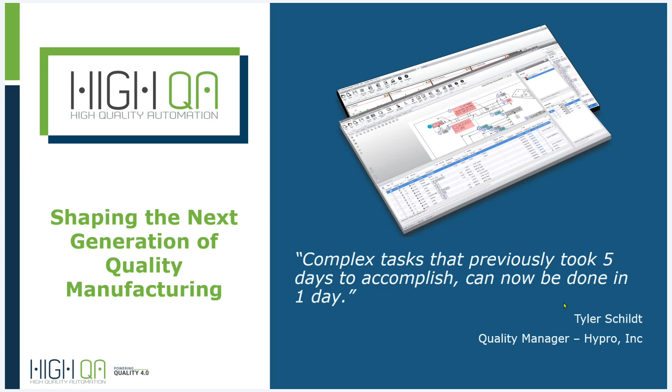HighQA is a manufacturing quality management system. We started this company about 10 plus years ago, following my 25 years experience in manufacturing, CAD/CAM, and realizing that quality is somewhat behind in terms of automation. Because quality requirements are growing and growing, and we're going to talk about it today, it's not enough to do good parts. It's also a lot of documentation like FAI, and a lot of what we call PPAP stuff that was born in the automotive industry and now adopted by the aerospace industry and medical as well.

We have partners worldwide, and Geo Informatics is one of our, I call it, executive partners. We have many customers already in India, and it's important to have a partner anywhere in the world who can support your product and provide services to your product. It's a product that has a lot of functionality and requires training and of course ongoing support. We are proud to have Geo Informatics as one of our executive partners.

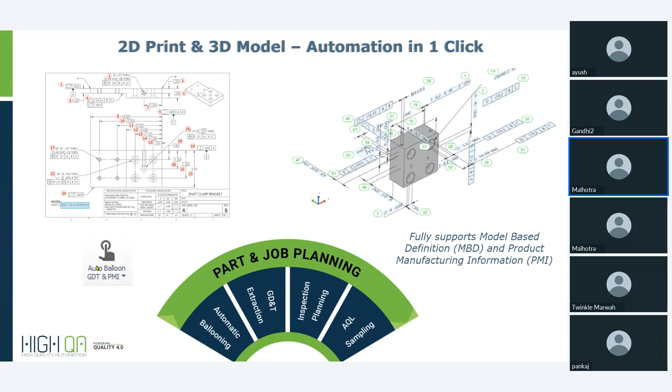When we talk about automated inspection plans out of it, very important is in-process inspection. FAI deals with the finished part, but we always need to do what we call manufacturing operations, not just manufacturing, but it can be heat treatment or plating or whatever processes you need to do. HighQA supports it, and this gives you the idea how we can integrate immediately with the control plan or FMEA from part level.

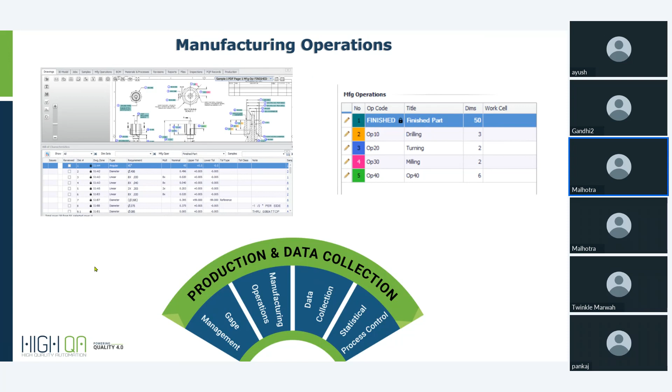I'll talk about it. Tool and gauge management. We integrate with any tool and gauge management that you have, but this one is integrated with HighQA. So the idea is to have complete traceability about which tool was used for each feature, who used it, what date, what time, what part number, what job number. Traceability is super critical when we talk about aerospace, let alone that we handle the alert for calibration. A lot of components here enable complete automation as well.

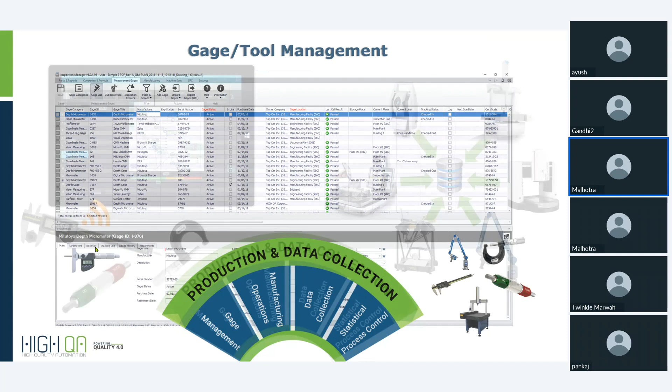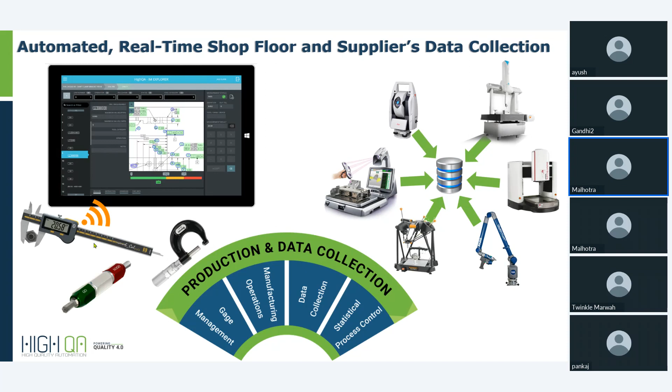As I mentioned, this is production and data collection. We take results from any inspection tool. On the right side, tools that generate digital results come automatically into HighQA. On the left side, any manual Bluetooth wireless gets to HighQA using PC, tablet, iPhone, whatever the case. The whole idea, HighQA is a paperless solution. We don't say start from paper and jump to paperless. There are interim steps that you can take and use less paper. One of them is, of course, complete data collection, not on paper, not on Excel, although you can fill it up on Excel and we will get Excel directly into HighQA.

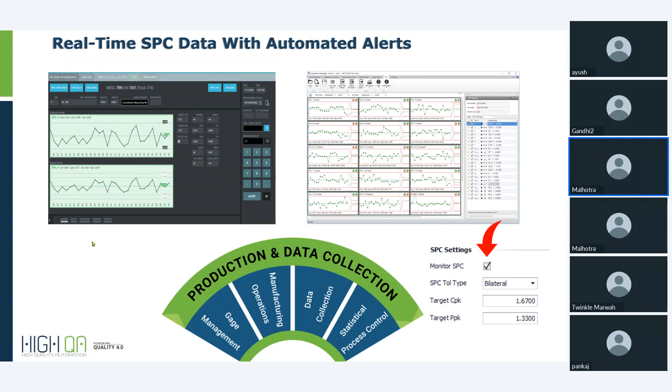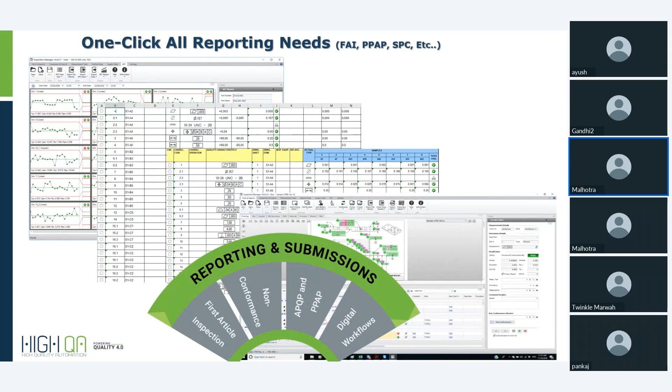As I mentioned, we also handle SPC. When you do massive numbers of parts, if you need to collect SPC data, it is integrated. This is one of the requirements when we talk about PPAP. So it's also integrated with HighQA. Then comes the automated endless reporting. Whatever report you need, the system will generate. You can design any type of report. So again, we can go more and more, but this is very important.

And I will conclude my PowerPoint here by showing you that PPAP is a tab in the HighQA solution. It's not Excel anymore, it's an integrated solution in HighQA. That means anything that you do on the part level will automatically propagate into the document level. So there is no redundant job, there is no copy paste. Those forms that you need to submit to your customer are in the database. You can build your repository of documents by document, by part, by customer, a lot of flexibility. And I'll show you a quick example of what it means.

And then comes, of course, supply chain management, which I will skip now, and we'll jump immediately to the presentation of HighQA.

I will ask my friends at Geo Informatics. Everybody can see my screen with the 2D print? Yes, we can very well. Yes, sir. Okay. So here is an example of FAI, and we need to run. We have about 20 minutes, right? Geo Informatics, just keep me on time. No problems. Keep going.

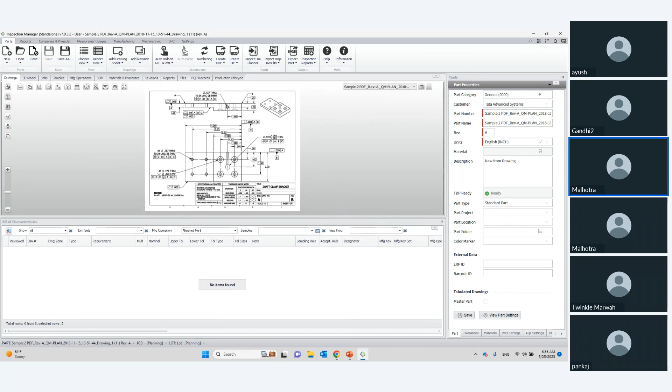So as I said at the beginning, here is a 2D print with requirements. Just quickly here, you can see we can open any CAD file. It can be CATIA, ProE, Siemens, SolidWorks, but we will focus on this one. In HighQA, the first thing I decided to do when I saw how slow the process in quality is, is to take any 2D print, click on a button, auto balloon, a lot of options here, and click OK. I saw people ballooning prints taking hours, sometimes days, with a lot of interpretation and labor. Let me do it again.

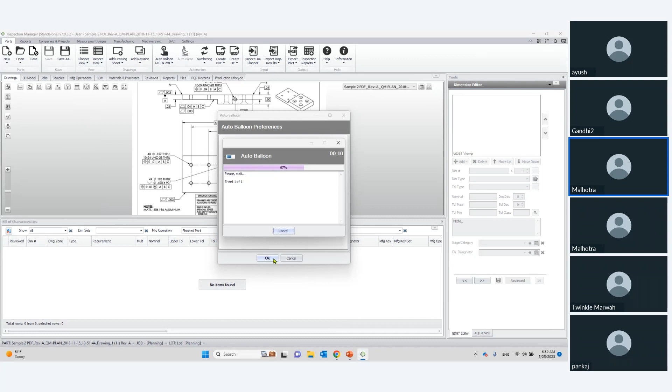So what happens is when we take the 2D print, we extract the data to a bill of characteristics. And actually what you're going to see here is a complete digital transformation. We took a picture, which is a PDF in this case, and we converted it to real data. You can see the ballooned print here, and I'll handle it very quickly. I don't want to spend a lot of time, but you can see what happened in 10, 15 seconds. All the bill of characteristics is now real digital data.

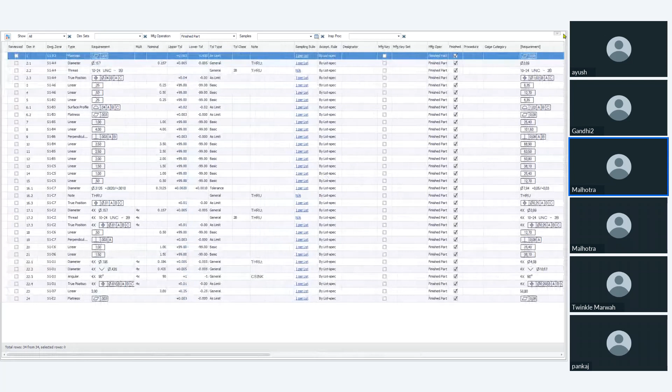So aside from saving a lot of time from people doing ballooning by hand and then taking it and putting it on Excel, still it's not data. On Excel, it's Excel; the print is a print. But now if you look here for a quick second, when you look into dimension 17, you will see the level of the recognition. You see 17.1 is diameter, 17.2 thread, and then true position. All of them are here.

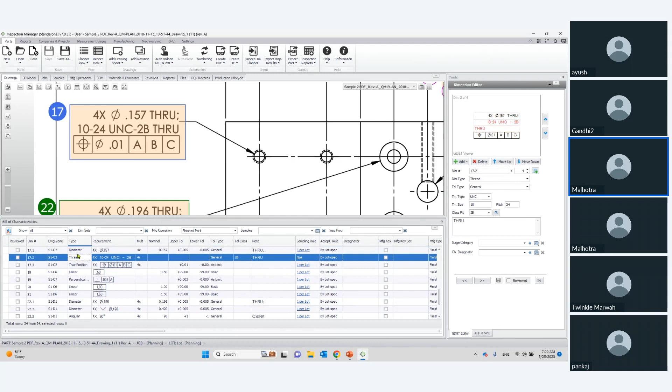And I believe you can see my cursor clicking on it. And it's more than just 4. We're talking about 12 requirements because we have 4 holes multiplied by 3 requirements. And you see the multiplier here. Quickly to the right side, you can see the diameter is highlighted red. And database, this is the key component. 17.1 is stored in the database 4 times. So in the database, you have 12 requirements, not just 3.

If I click here on multiply requirement, you can see all the 12 here. And that just shows you that this dimension, and you see that you can spread, of course, all the dimensions to the relevant holes here, and that's done. But again, if you have 50 holes here, you may need to see 150 lines, and that's why we don't show it, but it's in the database. At any time, I can reset all of them, and we are back where we were before.

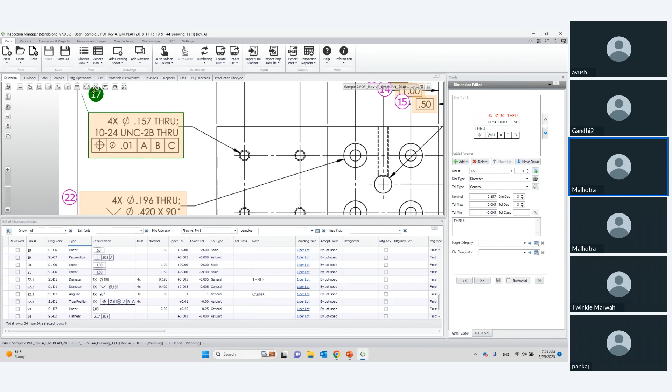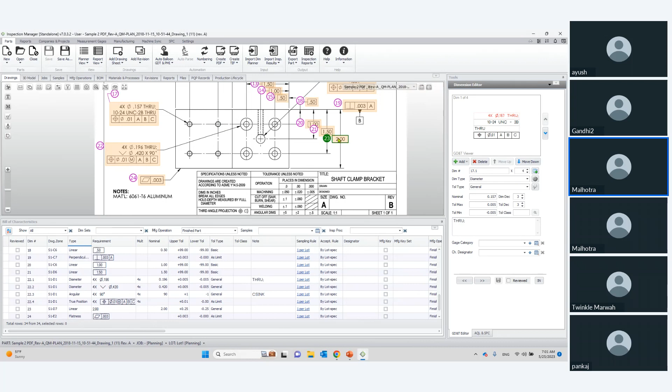So again, I don't want to spend, there's a lot of options on this first stage, what we call downstream preparation. It's about quality management system. It's not just ballooning, because we also manage revision. If you have an engineering change, we compare between the drawings. You can see where the changes need to be done. You can apply them, and we keep all revisions in place. As you see my cursor here, revision.

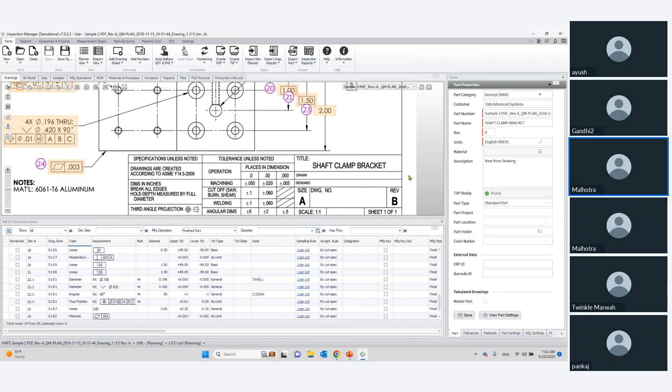I want to move forward to FAI, so I'll take a couple of steps here. If I go and start to say, okay, for FAI, I need to extract data from the title block. So I'm going to extract title block text, right? And I'm capturing the part name, and I'm clicking on it. And by the way, I'm not using the keyboard almost at all. Keyboard means mistakes. So you see the part name is in the database. Now I'm taking the revision and putting it in the database. So we have part revision.

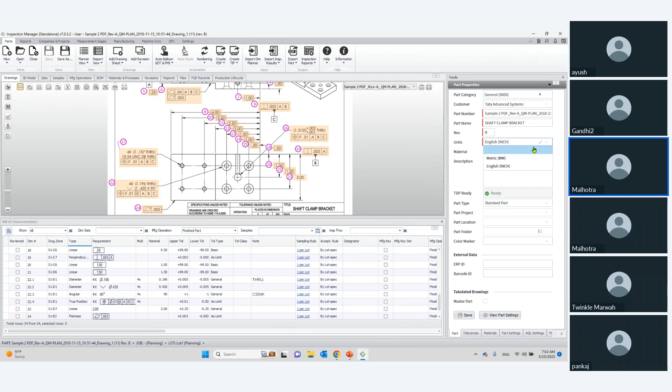In your case, it's very important because you may have jobs coming from outside, from India. Part of them inches, part of them metric. In this case, it's metric. We support dual units. We found many cases and many places where people need to convert units, they're using a calculator, Excel, and we found a lot of mistakes, mainly after the decimal point. We don't say do it like Excel or calculator.

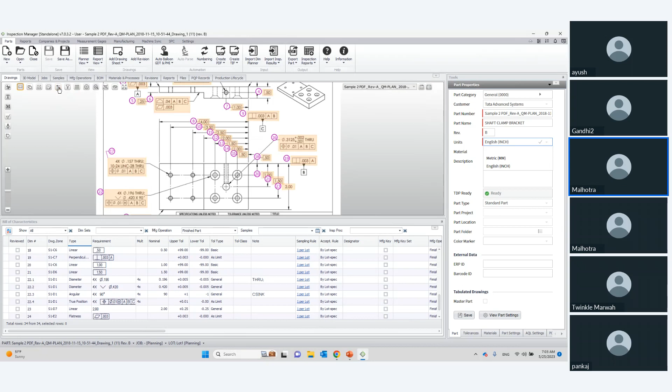In HighQA, all we need to do to convert between units is click on those 2 arrows. One click is metric, one click is inches. So that's also gone away. It's not magic. It's all already done in the database at the beginning of the process, in the first 10, 15 seconds. Another thing you need to do here is report on material. And when I'm clicking on material, I'm going to capture the material. And this material is now also in the database, as you see on the right side.

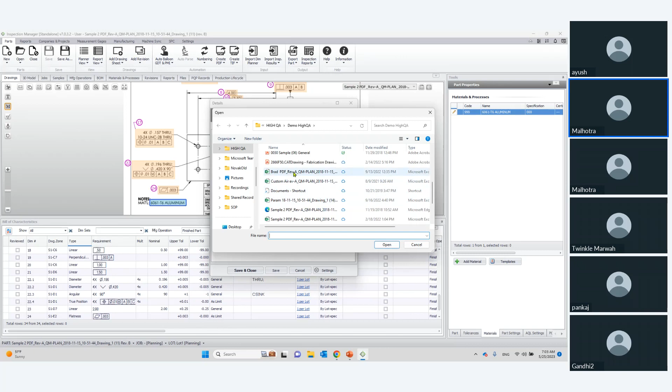For material, of course, you need more data. It's not enough just to say material. So every time you see a pencil in HighQA, you can add all the relevant information for material: code, specification number, the cert number, who is the supplier that you bought the material from, and you can upload the cert, and the cert will always be in the database. I'm picking arbitrarily something here, 266 something, and now my material is in the database.

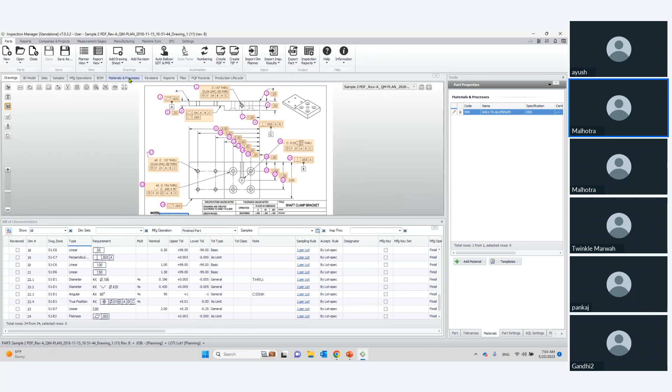Talking about the aerospace industry, there are auditors coming to audit you, and they ask for the cert. No need today to run and find it in folders, subfolders, or any hard copy. If you go here, you see material and processes, and here's my material. Here is my cert in the database. Nothing got lost. Nobody ever needs to do save as in HighQA.

It's all saved automatically, and nobody will lose anything here. I'm moving forward a little bit to say, let's create inspection plan.

But before then, I want to go here, for instance, to perpendicularity. As you see, it's here, and I can assign designators. So I said this is flight safety, and you can build your own designator here. You can assign gauge category. It's important because it's flight safety, your customer requires bore gauge. I know it's not right, but just to give you an idea that you have all the tools, what we call downstream preparation. We would like to avoid any interpretation from the shop floor or quality department, definitely from outside supplier.

Another layer, if we're talking about SPC, you can assign, let's say, CPK, PPK. You just click on it, and now perpendicularity is going to get data. I'll take another feature for CPK, PPK, if you're familiar with it, to collect data. Now that's it. That's all you need to do for SPC.

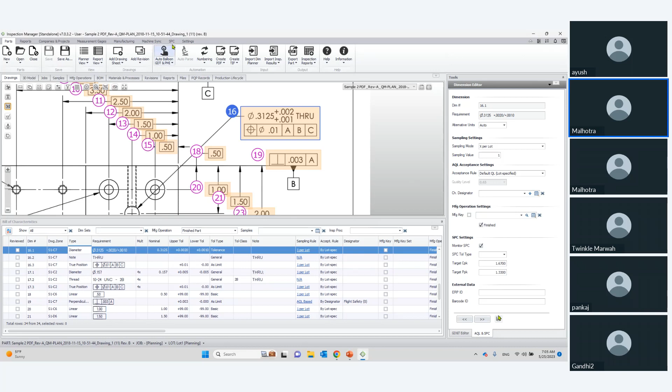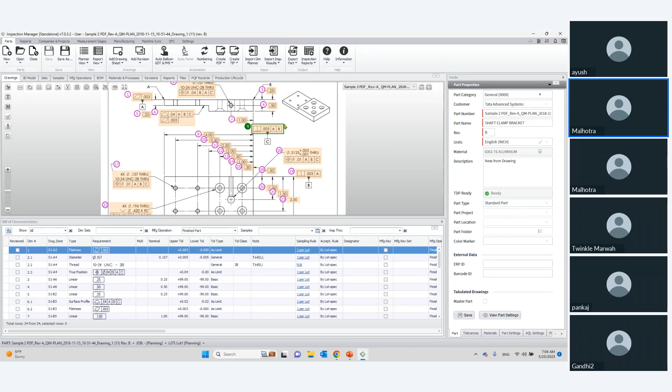If you go here on the tab, then you can see SPC here, and you can find those two features I selected. When we get production inspection results, SPC will be filled up automatically. So talking about downstream preparation, there's more that you can do here, but I don't want to spend all the time showing you all the feature functions. I believe it's clear that downstream preparation is done very quickly, and now we create what I call the common language for everybody.

Okay, I don't do copy paste, the system knows exactly where I am. And now you see what we call the common language, which is the inspection plan. I believe you can see it here. I put Tata because I think it's your customer, Geo Informatics. Here is the title block data, the material, the part. All the requirements are here, including the safety, flight safety, and the bore gauge requirement, and it's all ready.

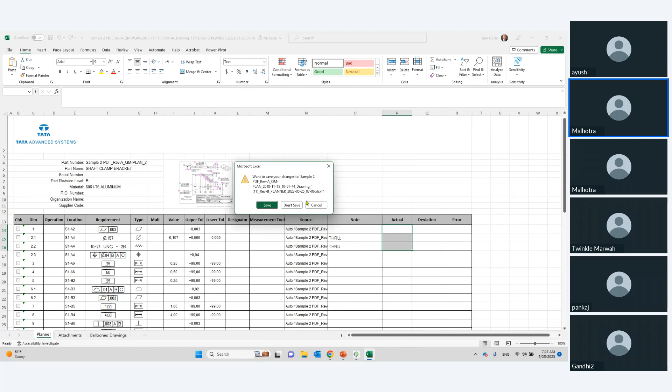Now actual can come here even manually, as I mentioned, but I would like to show you a better way to get inspection data. I will close it, and you see the system asks me if I want to save it or not. Usually you save it in a folder or subfolder. I don't save it, and quickly here, the reason I don't save it is because it's automatically saved in my report.

Now you can see inspection plan, you see the date and the time, it's US time. And every time you need to see any document, it's always in the database. And if you want to see it again, click on the eyeball, and here you go.

Now, when I say you don't save it and it's stored in the database, it's important to mention that HighQA works against jobs. So if you will not create a job or we are not getting it from ERP, the system, when I'm creating a PDF, will create a job. But quickly here, when we get a job from an ERP system, you have a job number, you have the quantity, and then you can assign already what the quality requirements are based on your customer requirement, like AQL, acceptance quality level, inspection level, and you can manage it in that way.

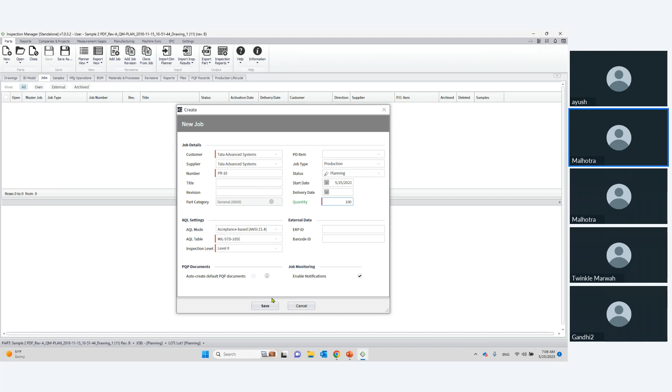So when I'm creating a job, the system isn't just creating a job, it builds for me everything, including the lots, the sampling that I need to do, designator, notification, file, and this is very important, which I'm going to talk about. You can see here, auto create PQP document.

This is the PPAP. You can say at this point, all I need here is standard new part PPAP index, what workflow I would like to use, right? And have your workflow in my repository.

And once you do it, okay, once you do it.

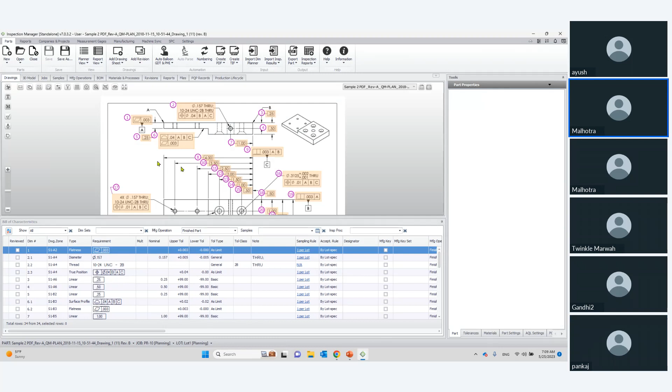Okay, so we have everything, and now we work, of course, against job, and I have all the quality requirement ahead of time. So everything's saved against job number. You can have a master job number. Let's say my customer wants 10,000 pieces of something. So you can create a master job, and every time you need to provide him 1,000 pieces, there is a sub job. It's all managed here with your ERP and directly with HighQA.

Now I would like to simulate here, we don't have a lot of time. I would like to simulate here FAI, reading results from CMM. So every CMM, I'm going to export the part as CSV. Every CMM output data, I'll put it on the desktop. Every CMM output data can be, I'm going to put it in Geo.

Desktop, it's open. Now you can see Geo here. Every CMM, VMM, the output is either CSV, XML, or text file, and the team at Geo Informatics will confirm it. They are the experts, of course. But you can see here the part in a CSV format.

We have here the nominal, and in column X we don't have actual. So what I'm going to do is take the nominal and convert it into results, like I have CMM results. Control C, and I'll paste it here in column X, Control V.

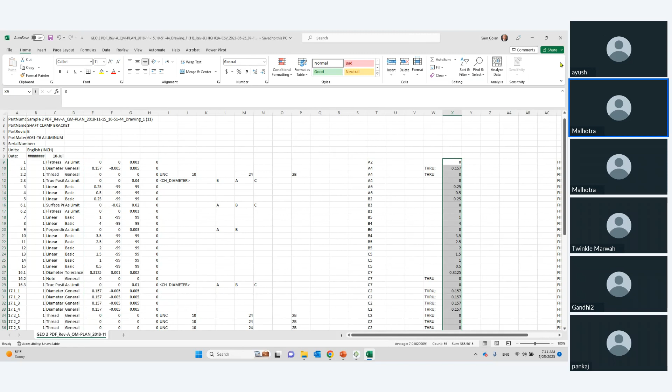I'm going to save it. Now, very important: in HighQA you don't need to do import like I'm going to show you shortly, in 2 clicks. We have import of inspection results coming from a folder that sits in your network, and all the results come automatically and directly into the HighQA database.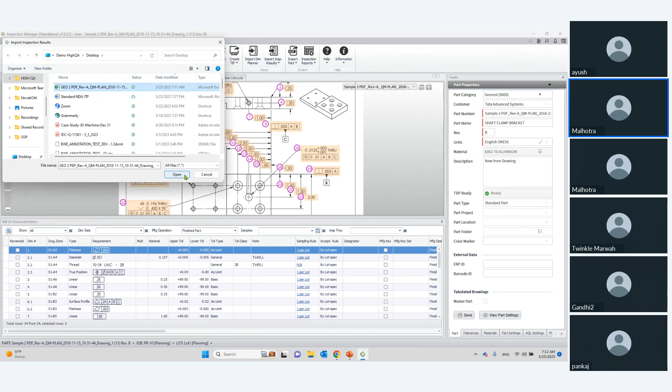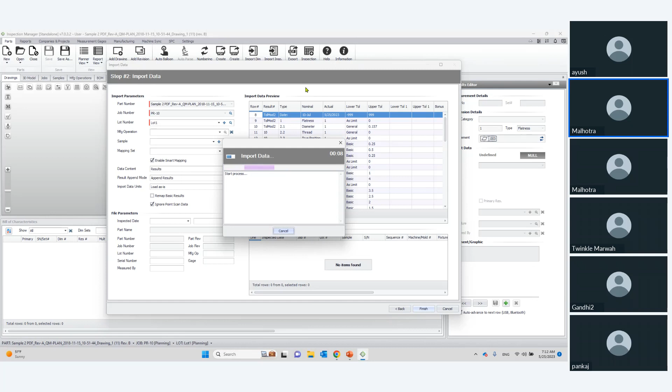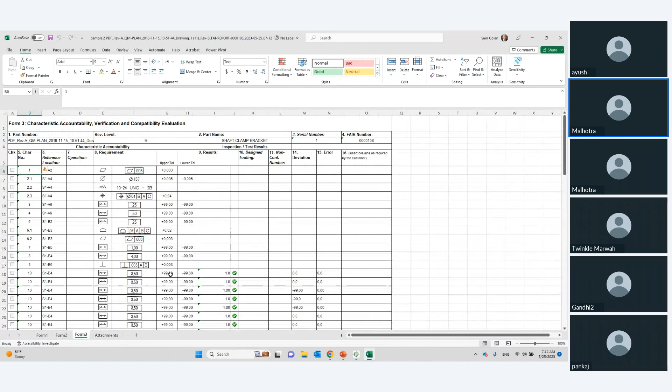So now I can create what I call an FAI in one click, after I have all the inspection results in HighQA. I can go here and create the FAI, one-piece report. My FAI is completely ready, and all the data and results are in the database. You see Form 1, Form 2, Form 3, right? All the attachments and everything is actually in the database. As usual, I'm not saving it, but you can have tons of results here.

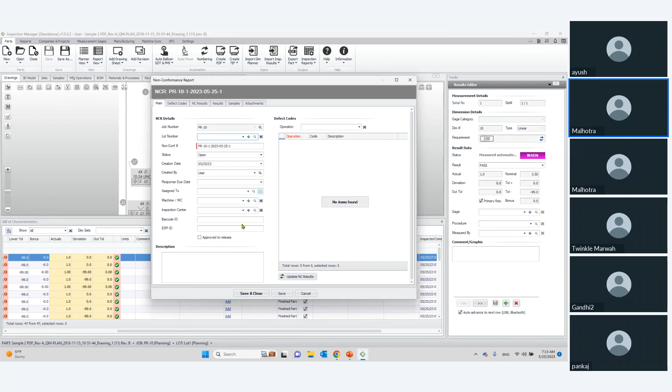And if you have failed data, you can have what we call a non-conformance, as you see here. So you can fill up non-conformance immediately. It's all rounded out completely, starting from the 2D print all the way to the inspection plan, incoming inspection, and of course the report.

I can close it, and I can open it again - I'd like you to see the HighQA database, and I can open it again. Nothing got lost. All the information stays here against the job, as I mentioned.

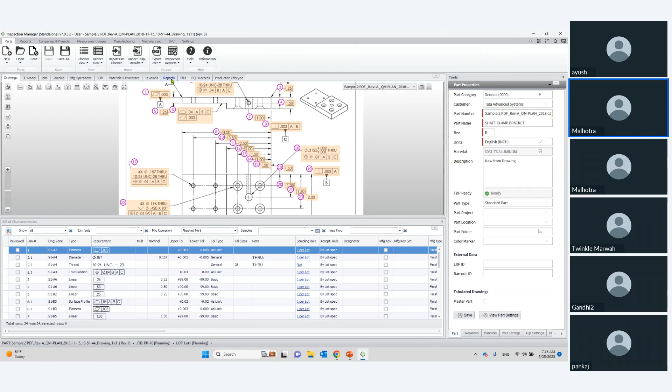If you see here on the report, now I have two reports: the AS9102, and the inspection plan. Quick question for my friends at Geo Informatics.

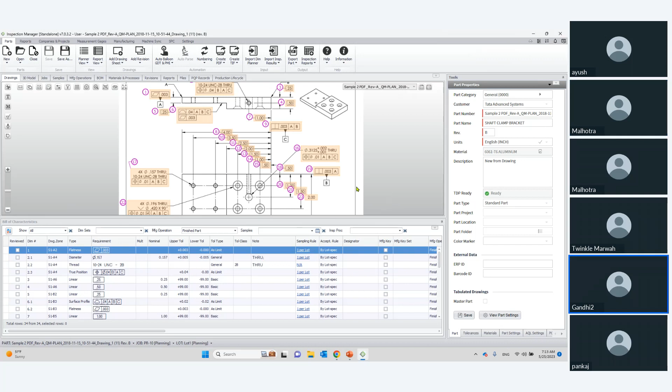Can I continue in another two to three minutes about the PPAP stuff? Yes, yes, you can go ahead for another five to six minutes, no problem.

So now, here in the system, we have the job number, we finish it, and I can go to my PPAP document. I'll just simulate a little bit and show you more than that.

I'm saying, okay, this customer needs a standard new part PPAP, and I'm clicking bring me. So at this point all my submission forms are here - design record, part submission, FAI - and whatever I did on the side of the part propagated automatically into here.

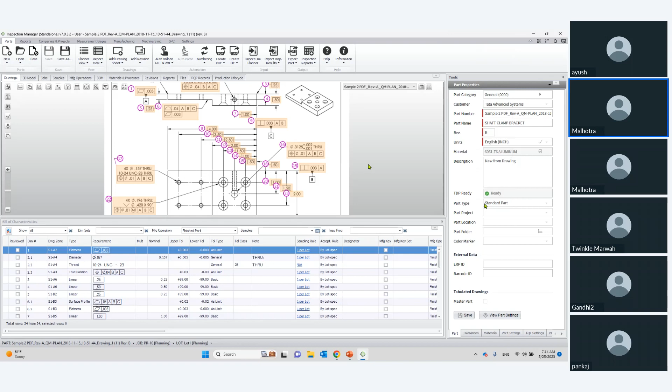So if I go here, I'd like to emphasize something very important - how this stage of what I call downstream preparation already propagated into my PPAP document. So if I go to manufacturing operation, the system says, okay, this is your finished part. I know you know how to do FAI, but what happened from the raw material, which is the block of aluminum, all the way to the finished part?

So I'm going to simulate the first operation, roughing - that means I'm going to rough the part, bringing it to this shape, and leave some material for semi-finish and finish. As you remember, I'm coming from manufacturing industry, so I'm taking the width, the length, and the height, which is my box in a way. So I'm adding the operation.

So one operation is already added, and I can add as many operations as I need, not necessarily manufacturing. As I mentioned, it can be plating, heat treatment, all types of operations. That's important when we talk about the control plan and FMEA.

So you remember when we talked about the pencil - now we can add data. Now you can see here, a very important thing: this is where we start working on our PPAP stuff, the control plan. You see process - this is your company's process library. You can have here 500 processes, not necessarily only milling, manufacturing, cutting - whatever it is. You can have other materials, all the processes that have impact on your control plan, FMEA, etc.

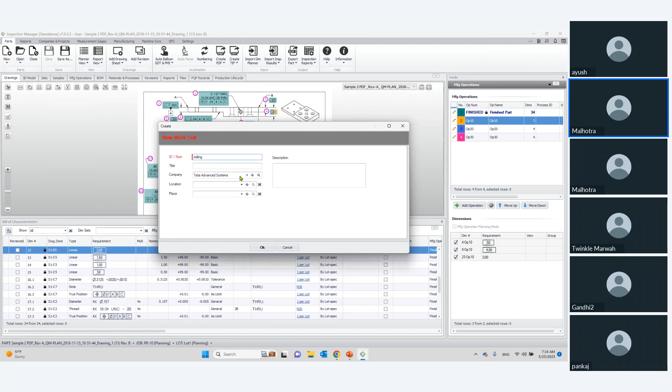I call it milling, and I have a title for it. I have a lot of stuff I can do, but I don't want to spend time. I click OK, and I have operation 1, then 2, 3, 4, and 5. So the system is smart enough to handle all types of operations, and it's smart enough to create an operation sheet. Now you can see only three measurements for what we call roughing are highlighted.

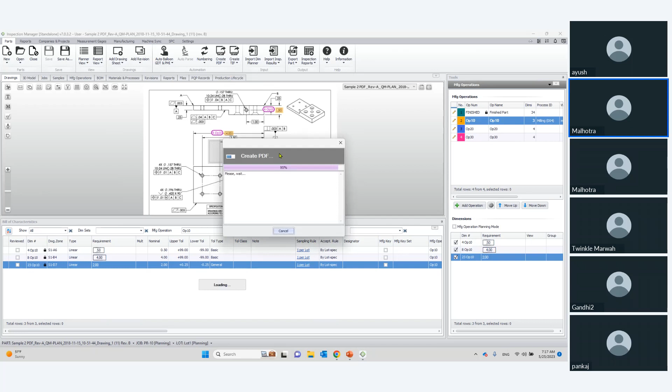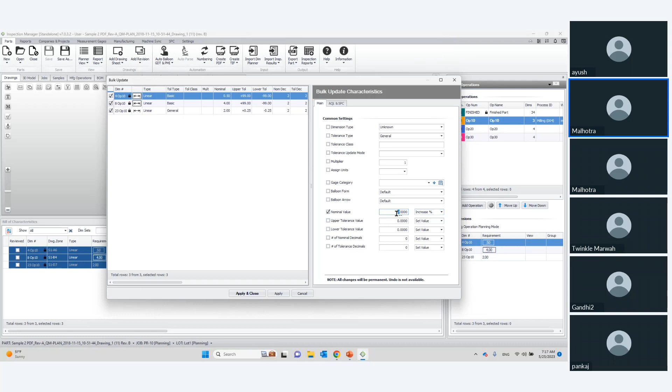So I can create an inspection sheet. Of course, I can go and create my PDF, as you're going to see here. And I can create an inspection plan for OP1. You see the nominal and tolerance are for the finished part, but you can add to the nominal value. I can add nominal by percentage or number, because I need to leave material from the nominal itself, which is the finished part. So I added a little bit of material. A lot of capabilities here, and I create an inspection plan for operation 1, 2, 3, and 4.

So all of them is done, and you can handle high QA processes without needing to get out to any other system. And you see OP1 again, actual. At this point, probably the actual will not come from CMM, but it will come from data collection on the shop floor when we talk about OP1, 2, 3, etc.

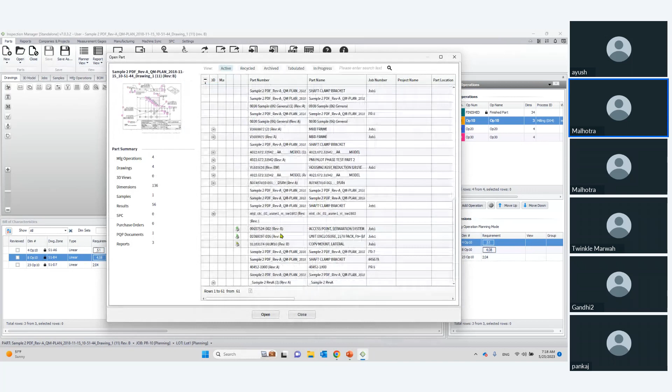When we go back into the inspection plan, I would like to touch base a little bit here. When we talk about the PPAP stuff, now there is an option here, what we call to fill up my process library. And now you can fill up your process library. If you go for any type, like milling, whatever the case is, you can see below what milling is, what is the P-flow and template FMEA. You can build here, add a new row or stuff like this, and add all the failure modes.

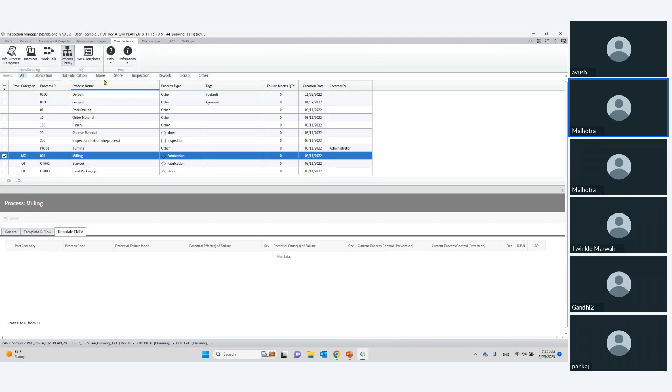And when we go here into settings, you're going to build up your component library. You can say here's my system component. I have indexes, and the indexes can be FAI, standard PPAP, and each one of them contains all the information, all the forms that you need. There are workflows. So what you see here actually comes out of the box, and you can add your own forms. If you need different form customization, it can be done.

Going to system component, you can go and create other indexes. You can build it based on your parts. You can create a folder, and I can create Boeing, for instance. So you can create all your hierarchy, and under Boeing I can create another subfolder. I can create another folder, calling landing gear. I think I wrote it right, save. And under landing gear, I'm going to get all my parts.

And under all parts, I can drag and drop all kinds of indexes or separate forms. And once it's ready, the system will automatically, if you remember in the job level, let me go back here to the part and I will conclude. In the job level, if we are here, I can set up my PQP and say, okay, for this part I don't have it because I don't have everything. When I fill it up, then the system will automatically propagate the PPAP requirement automatically. We don't need to do anything, and it will be filled up automatically into the system.

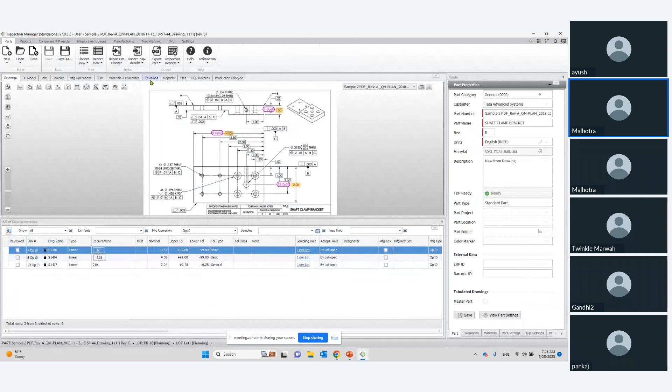That's definitely HighQA, but HighQA does much more. We are handling the content, what's inside the file, as you know, the bill of characteristics. I'm sharing again my screen. When we talk about revision management, it's an existing revision, but I can, you see, add revision, and I'm bringing another print that has an engineering change.

HighQA compares between the content. So the two prints are on top of each other, changing color, and we show where the differences are. And when we accept it, we add balloon, we delete balloon, whatever you need, and this second revision is here. What you see here is like check-in, check-out, but we handle also the content. So that's a big plus. Sorry about the long answer, but I thought it's important to explore more.

Sure. The next question we have from Mr. Rangaswamy. In the production environment, our inspection plan has to be dynamic, WRT sampling inspection report. Can I use my previous inspection report data to decide a dynamic sampling plan? I'm not sure I completely understand the question, but when I heard dynamic and I heard production and I heard sampling, I'm trying to connect the dots.

So HighQA, when you create sampling, that's one thing, but sampling may change for different reasons, because you may say, I need to inspect 300 pieces, and based on this, an AQL, acceptance quality level, and other parameters, I need X samples. Let's say I need to make 30 samples from 300, so every 10 I need to check. But you may say, not this way I want you to do it.

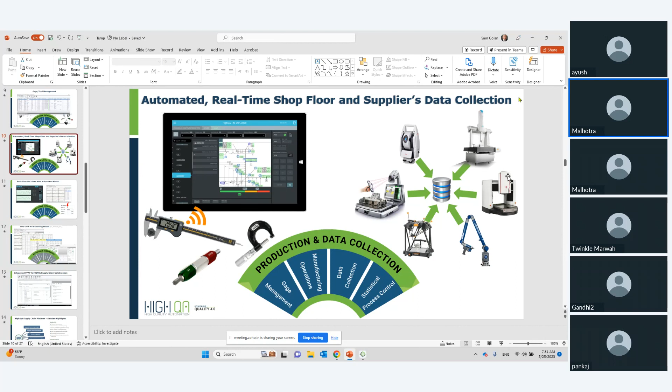Okay. The next question we have is how the tools can be captured in this. How the tools, the inspection tool, you mean? Yes, I guess, yes, that is correct. Okay. So if I go here back to HighQA on a part, okay. I mentioned here, if you remember, that I selected a feature, I can assign here a tool category, okay? But I didn't go there because of time. But as you see here, all your inspection tools are here.

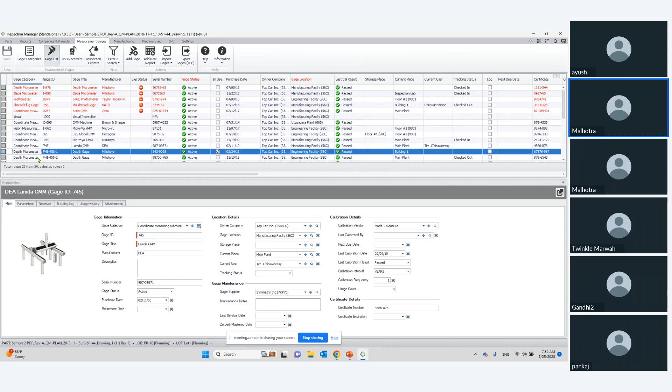So when I am selecting an inspection tool, the system requires the tool ID. You see gauge ID 745 here, gauge ID 174 here. So we can get the exact tool ID if you scan a barcode, QR code, enter it, take a picture, whatever the case, we require. If you don't give me the gauge ID, I will not accept inspection results unless you have a general gauge ID, and then you can force the system. This is not what I recommend. But the idea is that I want to see if I have something here to share with you. Oh, I have some example here.

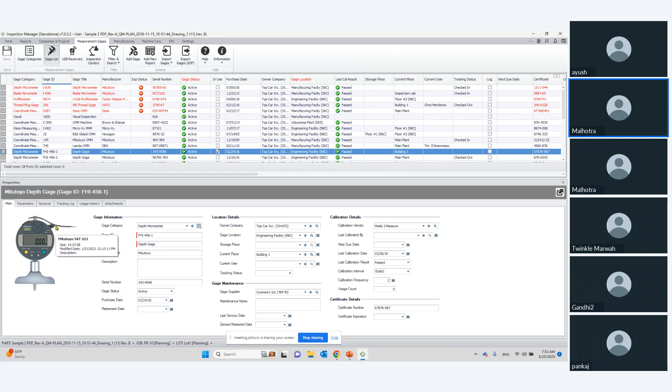Yeah. You can see here, when I'm talking about, for instance, a depth gauge, when I'm taking results with it, the system stores all the usage history for every inspection tool. And you can see here an example, usage history. We know the part number, the job number, the lot number, the serial number, the results, failed, more. If non-conformance, open, what operation, what gauge ID, who is the user, date and time. So we collect everything automatically.

How is it done? Because the system can manage users. That means not everybody can do whatever they want. It's user and credential. So you log in the morning to the system, we know who you are. If you have Active Directory, it's one login, you don't need to do more. But we know the user. We know the job number. We know the part number. We know the feature number. We know the tool number. We know the date. We know the time. It's all done completely automatically.

Now, here is an example. I'm expanding a little bit. You can see here those red ones, with expiration status, they didn't go through calibration or whatever reason, retired. We don't delete them because there is history as well here. But nobody will be able to enter inspection results from a tool that is out of calibration. The reason is here.

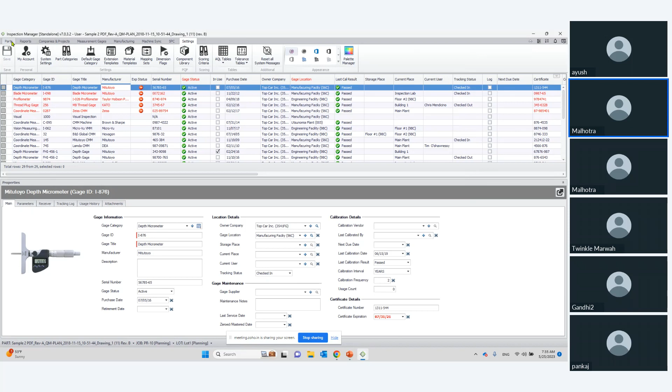You definitely can get anything to Excel from here. Absolutely. Exactly. The system enables you to export to any format, anything, anytime. You see, export part, I did it for CSV. You remember when I simulated inspection results, but I can export it as XDFX, CSV, SPC. Even if you are using a different SPC, we can export the part in any shape and type.

Sam, I can just add one point here. Any shop floor equipment, from a digital vernier to the level of CMM, can be added directly into the system. And within our country, we have done this work with a couple of organizations. I can surely name some of them. For example, LG is one of the companies, of course, not in aerospace. The second one is Motif, which is an oil and gas component producer. All the CMM shop floor equipment are being engaged together.

Right. Okay. The next question we have is, so we do not need macros to convert the data into an organized Excel sheet? You don't need macros, you said? Yes, macros. Absolutely nothing. Okay.

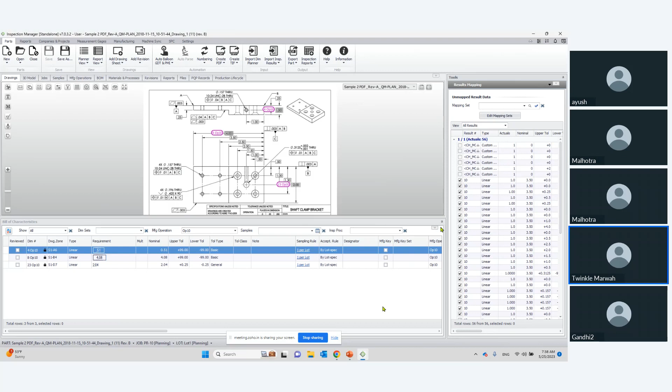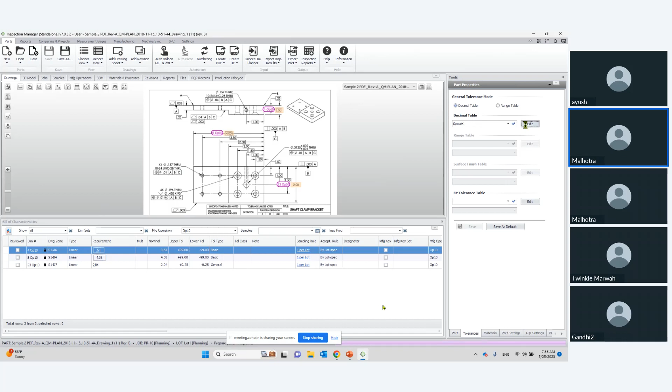The next question we have is, how to create a new tolerance table apart from the already given international standard tables in the software? Okay. In the part properties, you can see below here, tolerances, right? And I can say, here is my decimal table or tolerance table, right? And you can see here, edit. So I can do a decimal table, any shape, form. I have SpaceX, I have KV, I have J.

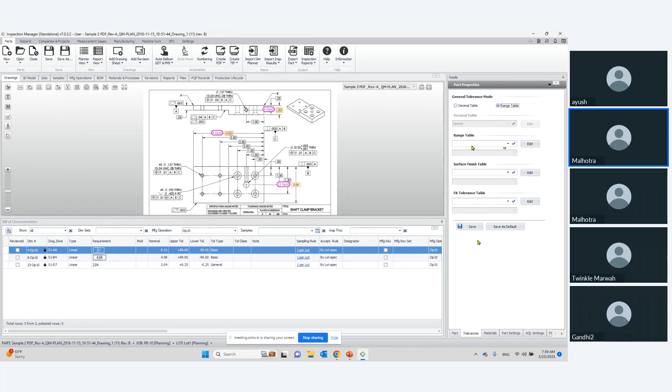So you can click here, you can add and call it another name. Call it, I'm playing, of course, call it Boeing, whatever it is. Then you create your English matrix, whatever you need. You can go here on the range table and create a range table, a surface finish table and a fit tolerance table. It's a lot of capabilities. And once you save it, let me be clear, just to make sure we understand what I'm talking about.

In, let's say, SpaceX, which has its own tolerance table, all the GD&T that are on the part, on the drawing, will be recognized by HighQA. All the non-GD&T, when I don't have GD&T, we're going to take it automatically from the table and apply it on the bill of characteristics. Okay?

Hello? Yes. The next question we have is, does the tool read a document which is a scanned PDF copy of a printout? Of course, we can read any document.

Now, to make sure, you saw here, we did it in, there is echo, guys. Somebody needs to be on mute.

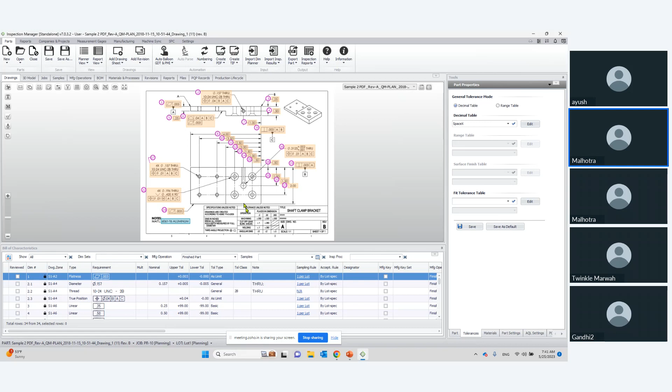When you have a document or PDF or scan of a scan of a scan, here is the most important statement. There will be no document or drawing, whatever the quality is, that you will not be able to finish in HighQA. This is one statement. Second statement, it may not take 15 seconds, it may take 3 minutes or 5 minutes or 15 minutes, depending on the amount of ballooning. But here is my third statement, which is super important. Once you do it and you invest a little bit more time, all the bill of characteristics here are trusted, okay?

In many cases, we have customers with drawings from the 60s on Sikorsky, and it's mainly repeated parts. And they worked for weeks on 19 pages of hand drawing, not drawings done by a CAD system. In HighQA, instead of doing it in 3 weeks, they do it in 3 hours. But right after that, all of those bill of characteristics below are trusted. When they get the part again a year or 2 years later, they don't need to do anything again. They're going to give it a new job number. They don't need to balloon it again. They don't need to do almost anything.

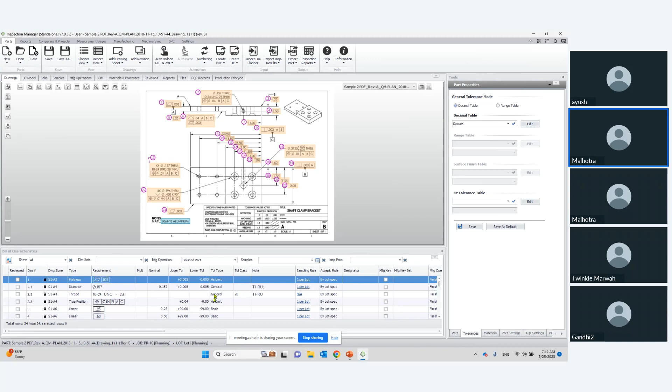So the whole idea is that you do it, whatever. I'll give you an example. We have a lot of time. Let's say we balloon this print and it's not a good print, okay? Let's say the first thing I want to do is, you see I'm deleting one of the balloons. Let's say I missed 1 or 2 or 5 balloons and the print is very bad and it's hard to see in the balloon jungle what I missed, because this is the first thing I want to do.

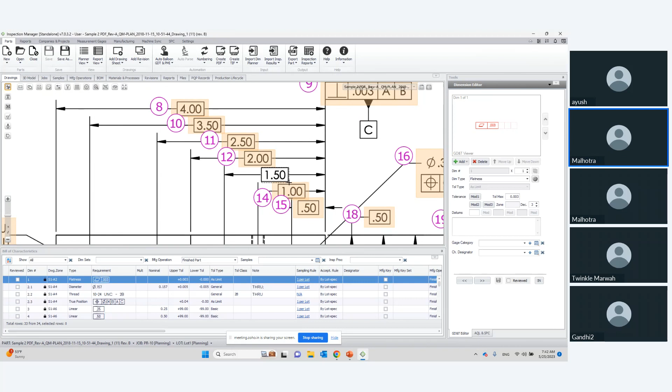So in HighQA, you can go here and click white out balloon, and now it's very easy to see what's missed. And I'm going to fix it in 1 second. I said, okay, this balloon is missing, so I can move it, I can change the size. I don't want to do it now. But see what happened, because I deleted, now I'm adding a new balloon number. I deleted number 13, but I got 25. 25 is n plus 1.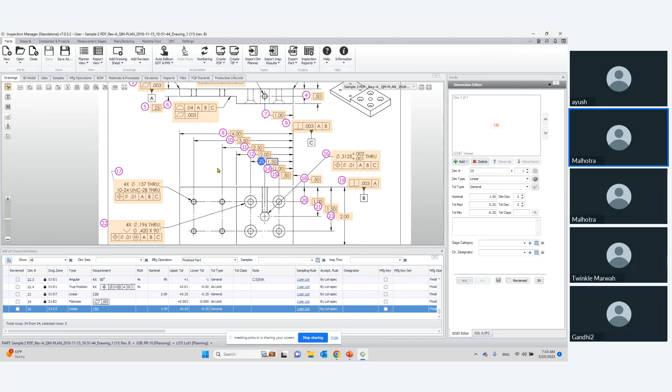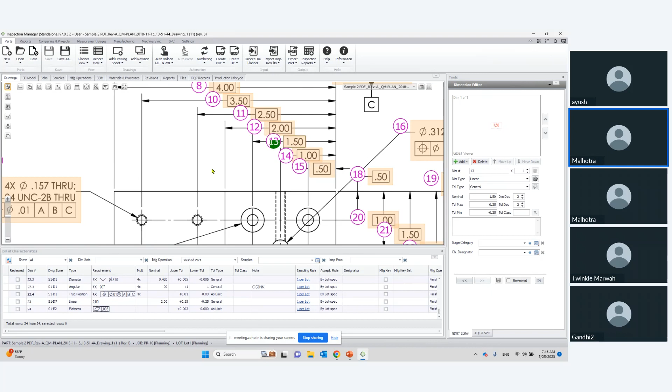It's always the last balloon plus 1, because of the quality management system. Because I deleted it manually, the system thinks that it's an engineering change. In an engineering change, when I'm deleting a feature and adding a new feature, I cannot use the same balloon number. But this is not the case here. So in this case, I can go and do renumbering, and I have 13 back, right? So I can do this very well and not miss a balloon.

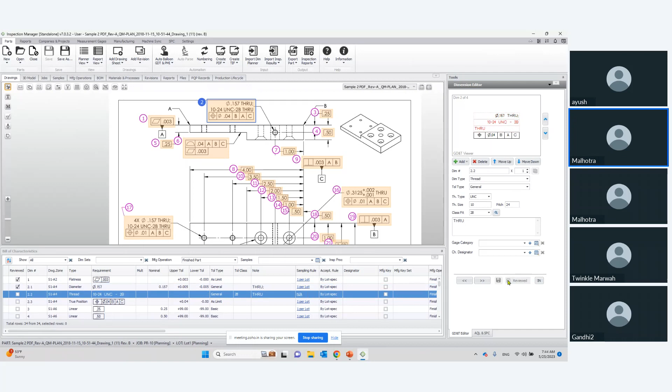But I would like to review quickly the whole balloon list here, which will take me minutes, sometimes more than minutes. You see here, I'm standing on balloon number 1. It shows me its flatness, and I'm saying, okay, reviewed. See, the system takes me automatically to 2.1, and I'm saying this is good. Then true position, it's good. No, it's thread. True position is good. Now it takes me to the linear, a mistake, it's not linear, it is diameter. It's not 0.25, it's 0.27. You save it, you click good, you move on.

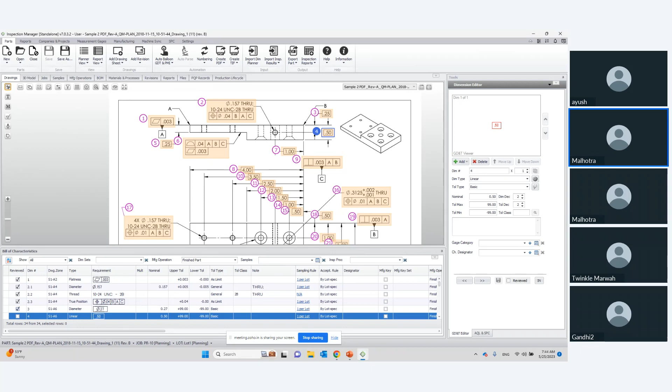Now see what happened on the left side. You see reviewed. So now you know it's trusted, okay? That's the only thing you need to do. It will not be 15 seconds. It may be 10 minutes. But now all the bill of characteristics is trusted. I explored more on this because it's important, because you're probably going to face more than one old drawing or scan of a scan. No issue. You can do it here. Once it's done, it's finished. Now it's in the database. Next time, give this part number another job number, and you're done. Okay?

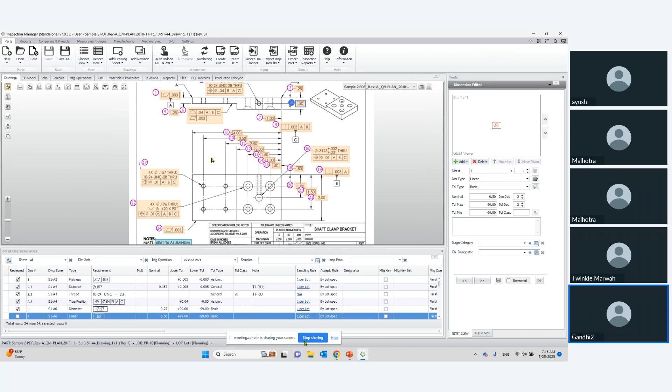Okay. The next question we have is, is ballooning auto ballooning or manual? Yes, of course. As I did, I added a balloon manually here. I can answer this differently to this gentleman. Ballooning is auto ballooning. When we say one click ballooning, it's auto ballooning. But there will always be some dimensions which could not be ballooned automatically. In that case, we have semi-automatic ballooning. Just by clicking with the right mouse, you will be able to balloon that. So 90% of the time it's automatic ballooning, and in some cases it is going to be semi-automatic.

Okay. The next we have is how the CMM report will link to the respective ballooning. For instance, if we are measuring 30 parameters in CMM, but the part has a total of 50 dimensions, how will the software identify the balloon number between the CMM report and the drawing that we ballooned using HighQA software?

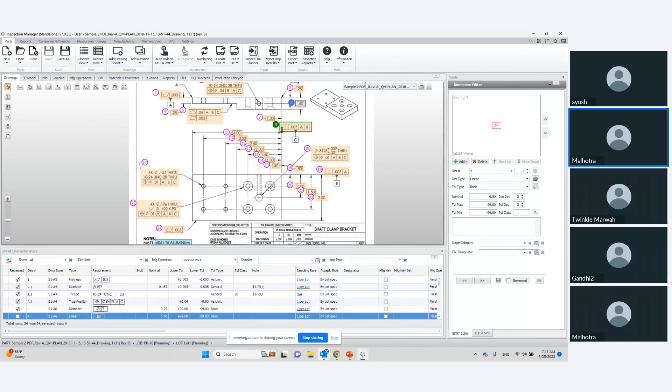HighQA? Okay. When we talk about inspection results, first of all, our recommendation is that when we create the inspection plan, if you remember in the report, it's still here, and this is the inspection plan. The CMM guy, when he programs the CMM, Hexagon PC-DMIS or Mitutoyo Cosmos or Calypso Zeiss or whatever you use, we recommend to put our balloon numbers from the print. If he gets the flatness feature as another number like 72, just change it to 1. If you are not going to do it, we know how to handle it.

I'll show you. But if he's not going to do it, no matter what, when you have results, someone needs to connect the inspection results to the drawing, right? So you may go and say, oh, I'm not going to balloon my print, I'm going to get inspection results, and then somebody will take the results and correlate between the results and the drawing. This is the wrong way to do it, but again, you can do it.

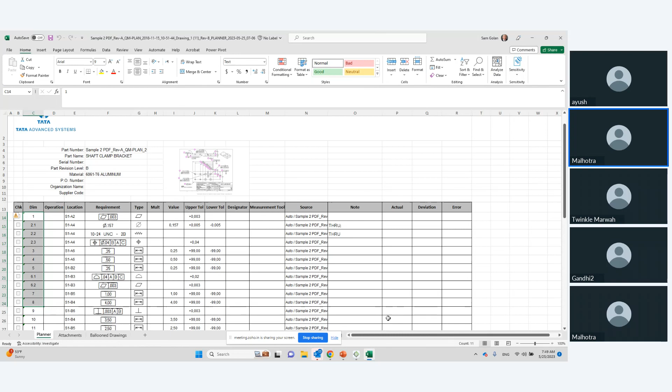That's one thing. So if you put all those balloon numbers to the relevant feature in the CMM program, and I know CMM well enough, it's 1-to-1, no problem. You may say, and this is something that we considered as well, I need 1,000 parts and I have 500 CMM programs already in my machine, and I'm doing repeated parts. I don't want to go and change 500 programs. That's why I showed you the mapping here, and what HighQA does automatically in results mapping.

So you can create the template one time, and from that point, for this specific part, whatever programming you have already in your CMM, you don't need to do anything. So it's one-time templatizing, where you're going to have maybe 10% that you need to match, because I can't recognize it 100%, whatever results I'm getting based on my bill of characteristics should match. All right?

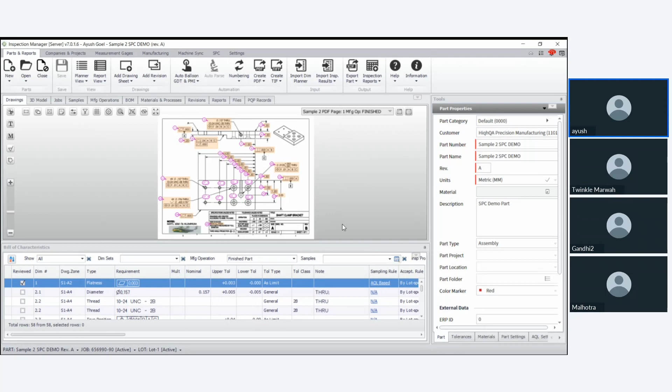As you've already seen, our partner Sam has shown you how SPC can be done and how the integrated SPC serves the purpose of real-time data monitoring. So you have the automatic database here. You have options to generate the SPC inputs, which allow you to trigger the SPC for selected dimensions, and you have the option to click on Monitor SPC, which takes all the measured values from the samples, and you can define the target CPK and target PPK values.

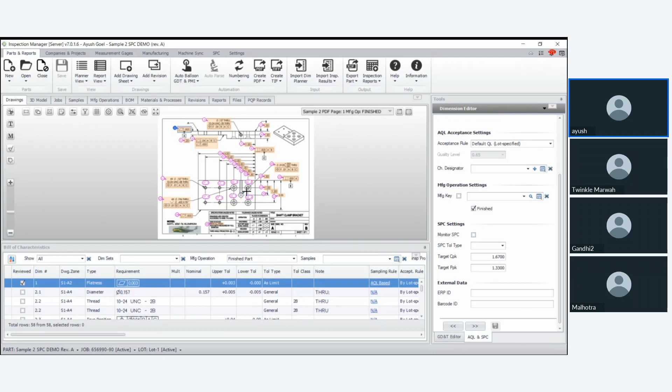After this, once you have the automatic data, you go directly into the SPC module. There you can see different run charts in the form of variations. These bullets represent the number of samples you've used, whether 2 samples, 5 samples, or 30 samples, all in real time.

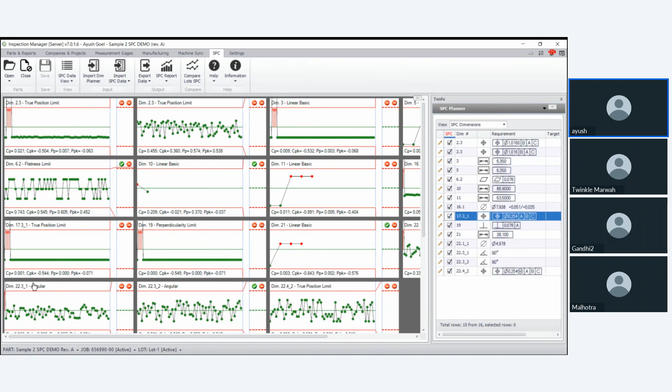But when you want to see the complete process control, you can go inside and see different charts like this, and these charts contain the complete information right in front of you. So you have different X-bar range charts, control limit charts, and histograms.

All this data can be generated in the form of Excels. Those Excels can be customized in your own formats, and you have the option to export this complete data in different formats. We support formats for well-known SPC modules and SPC software like Minitab, ProLink, and InfinityQS. So if you want to see the SPC report in Excel format, I can show you.

So this is the kind of Excel that gets generated, and it's all collectively gathered here. You don't have to touch anything or make changes in the Excel. It also shows whether your data is stable or capable along with that. So the Excels are totally editable and can be customized. Perfect.

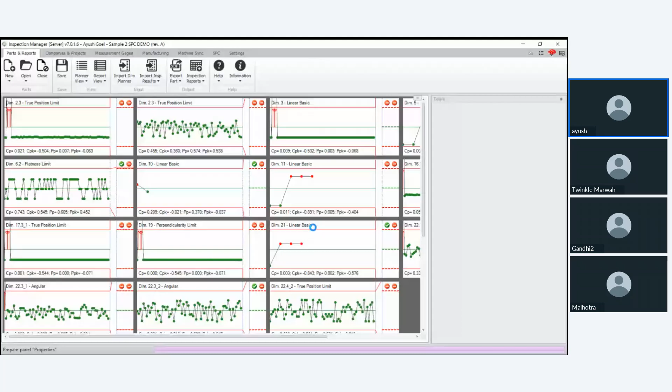So if you can see my screen, I can show you. Hope I'm visible to everyone. In case I'm using a fresh blank area — if your dimension is not visible and it's showing unknown, say it would have diameter at this place, but the software is not able to locate and recognize it.

So we can use diameter — we can write D here. Now the software has two options for dimension type: depth and diameter. Alphabetically, depth should come first, so why did it suggest diameter? Because the OCR found that in the drawing there are more dimensions of diameter than depth, so it suggested diameter here.

Now, another way, I can edit the nominal value, which might be any number. And since you've already applied the tolerance table, you can use this tool to auto-generate the tolerances — giving you exactly the tolerances required as per the range format or decimal format. When you do that, you'll find the gauge category is also applied, based on the dimension type here.

So now you have the data, you can save it, and that won't take more than 4 to 5 seconds, maybe 10 seconds. Then you can go ahead and do the rest of your planning.

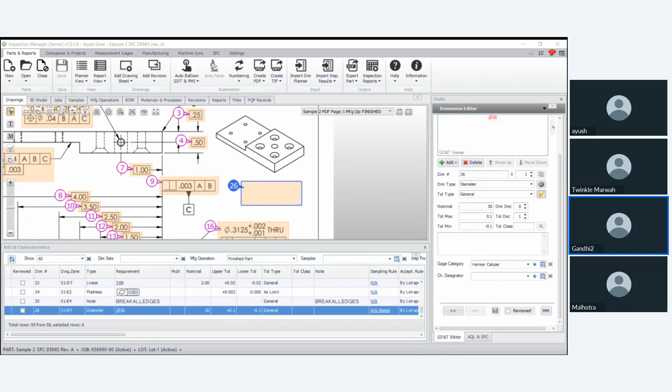So Twinkle, do we have more questions? No, sir, that's it. Okay, I think we are done with it.